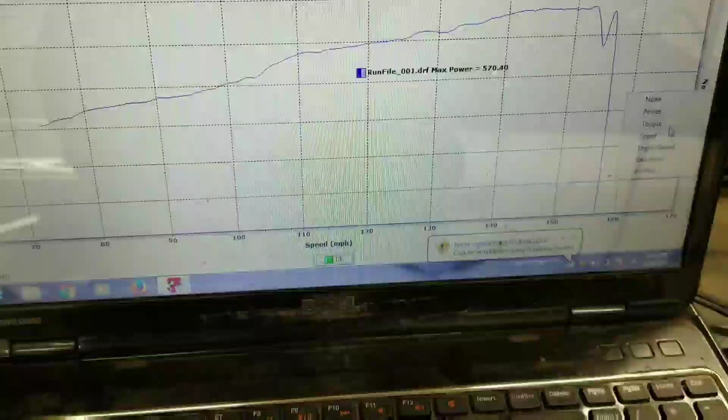Alright, so 2017 GTR. I just did a pull, and these are the results. 570 wheel horsepower, that's not bad at all. Let's see the torque. Torque is 489.99. Wow, that's not bad at all, right?

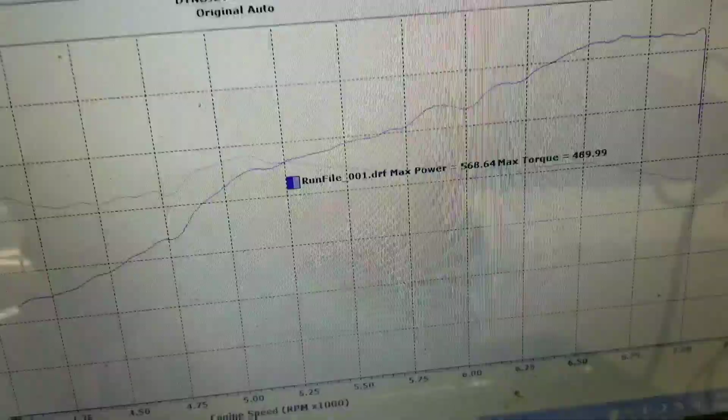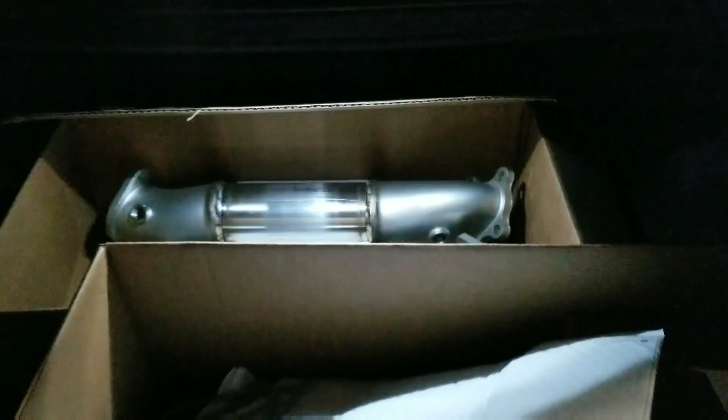Now we're gonna do everything as far as bolt-ons. We're gonna do intakes, they're actually in the trunk, let me pop the trunk. We're going to do all Catless AMS downpipes, the carbon intakes from AMS as well, a flex fuel kit, larger injectors, full exhaust, Catless exhaust, an ECUTEK tune, and then we're going to see what it pumps.

Alright, interesting. We started really high, so let's see how high we can go.

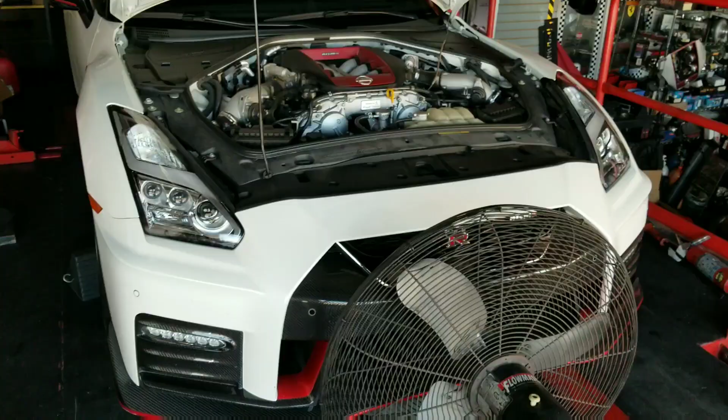Alright, good morning, so this is day 2. We're gonna start installing the intakes, downpipes, fuel system injectors, flex fuel kit, fuel pumps, all the good stuff. Then we're gonna move on to the rest of the exhaust. So it's gonna take a few days, but let's see how high it can go. Hopefully it can hit 700 or so.

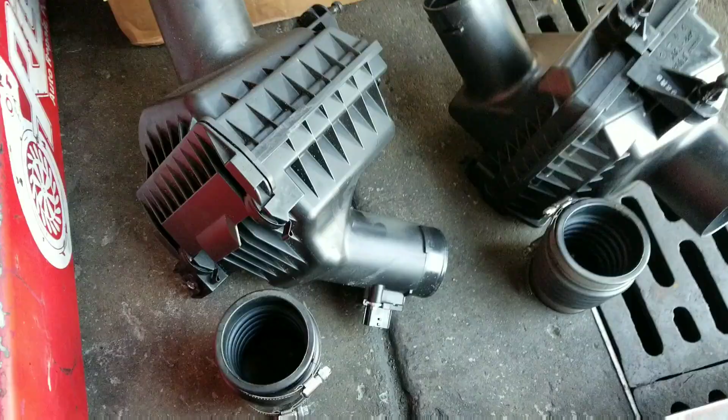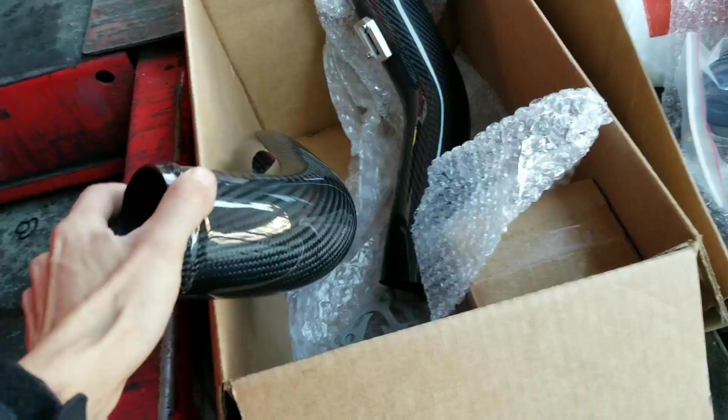Alright, so I just finished taking out the stock intake boxes. Nothing crazy, the same stuff you would find on a normal GTR. So now we're gonna throw in the carbon intakes from AMS, very light and really cool too. So this is the air filter. Let's see how it goes.

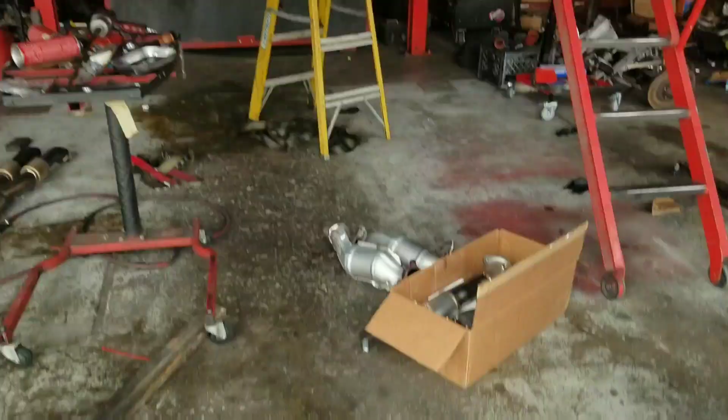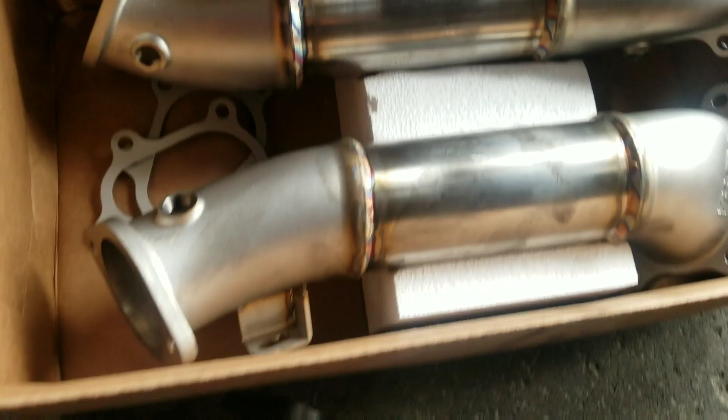Okay, so we have the car on the lift, and the reason why is because we wanted to do the exhaust now. We took out the stock downpipes, which have a huge restricted filter in them for pollution and all of that stuff. So we're throwing in the stainless AMS alpha downpipes, which have zero restriction, free flowing. That's the key for power, obviously less weight, and to unlock the flames that everybody loves.

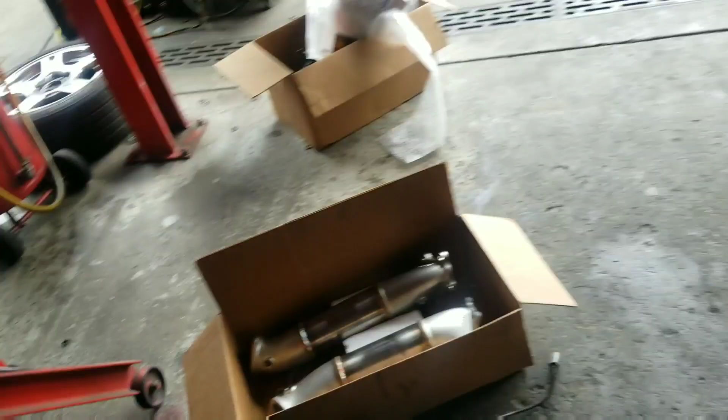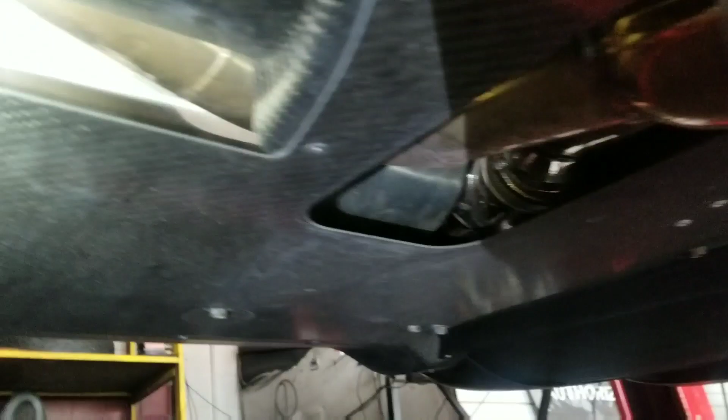What else? Oh, we're gonna do the Armytrix exhaust, so that's the Y pipe. Here's the rest of the exhaust. Can't really see it with the cover on, but this is upgraded too. And if you were wondering how the turbos look on a NISMO GTR, there they are, a lot bigger than the regular GTRs. So yeah, let's see how the rest of the build goes.

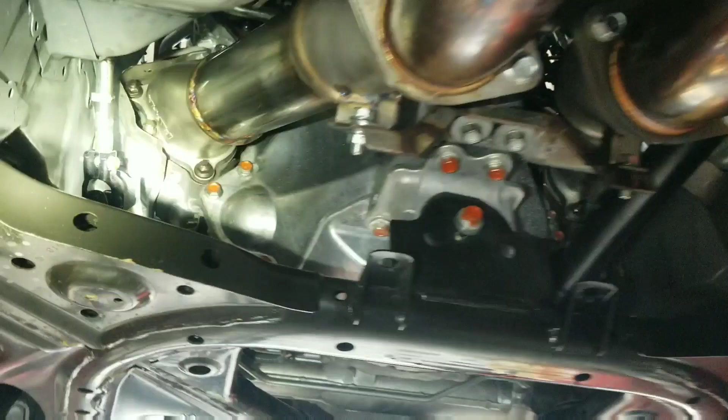Alright, so here's the entire exhaust all put together. So that's the downpipes, second one the Y pipe, and the rest of the exhaust. So now we have a nice free-flowing exhaust, so it'll sound really amazing. Can't wait to hear it.

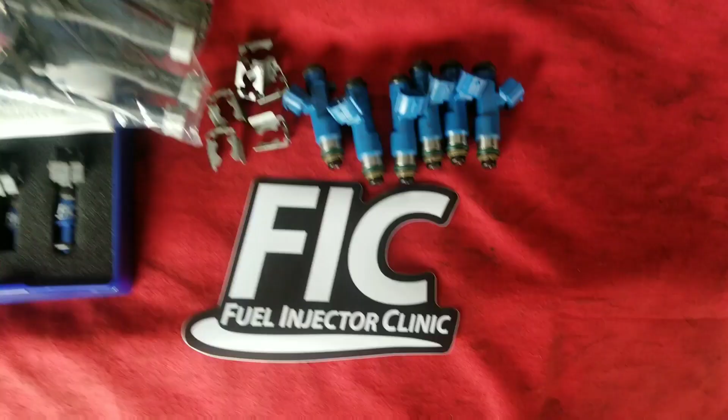Alright, moving on to the fuel system. We just took out the stock injectors, which look exactly the same as the injectors on a normal 35. So yeah, we pulled it apart and took all of that out, so we can go with 1200cc injectors from Fuel Injector Clinic.

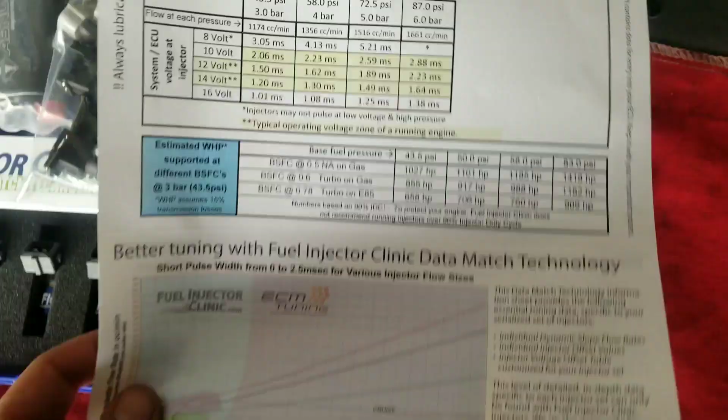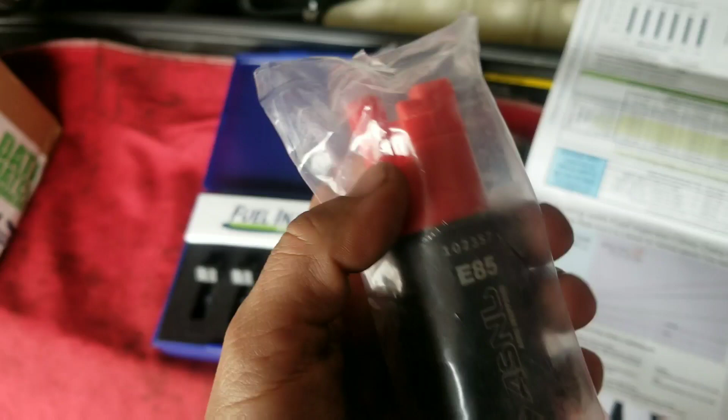This should flow to about 700 horsepower. Here you can see on the sheet these are 1200s, and the flow rate should be about 700 horsepower, so we should have plenty of fuel when we go E85 on this thing. The fuel pumps are also E85 compatible, so we don't have issues with the stock pumps rusting, and we have enough fuel flow. E85 needs a lot of fuel volume, so we have to do this anyways.

Alright, so almost there. One last step will be the flex fuel kit and some dyno tuning, and let's see what this thing puts down.

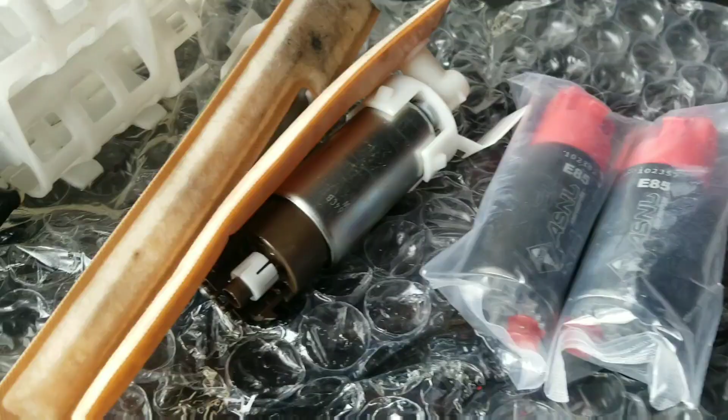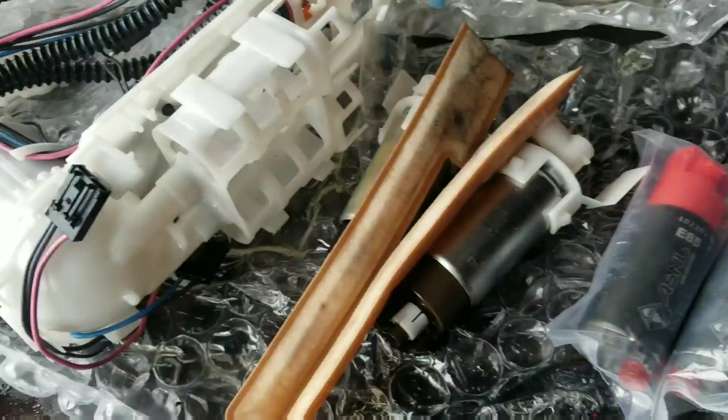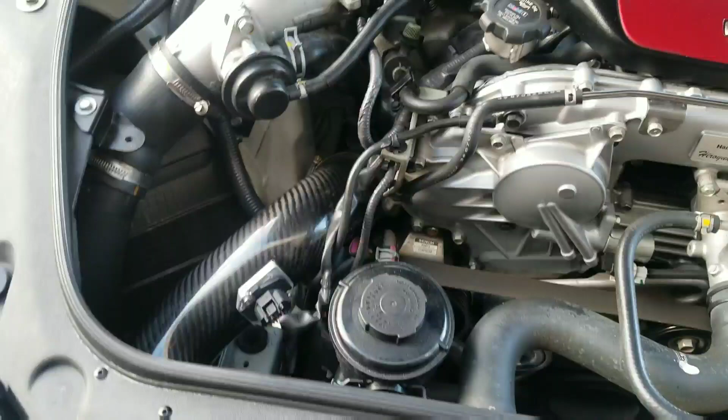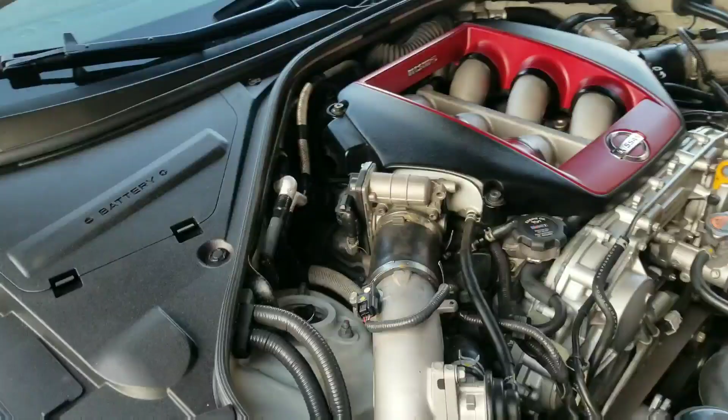Last step on the fuel system upgrade is replacing the stock NISMO fuel pumps with the E85 fuel pumps, and then it's all dyno tuning. Almost there. Okay, so the final piece of the puzzle, it's the flex fuel kit. The intakes are in, injectors are in, full exhaust is in. We are in Los Angeles, California, so this car will run 91 California gas and pump E85.

Alright, so I have just finished uploading the map via ECUTEK, so this is the time to hear it.

Wow. So that's with everything we've done in the past few days. So let's check it out from the outside.

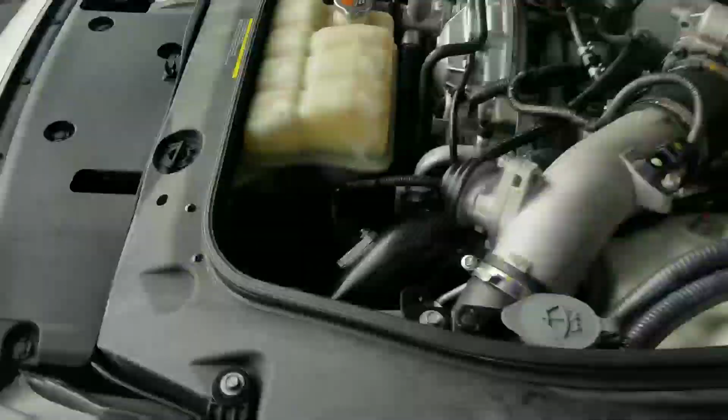Definitely louder than before. I'm gonna let it warm up and then I'll come back with you guys.

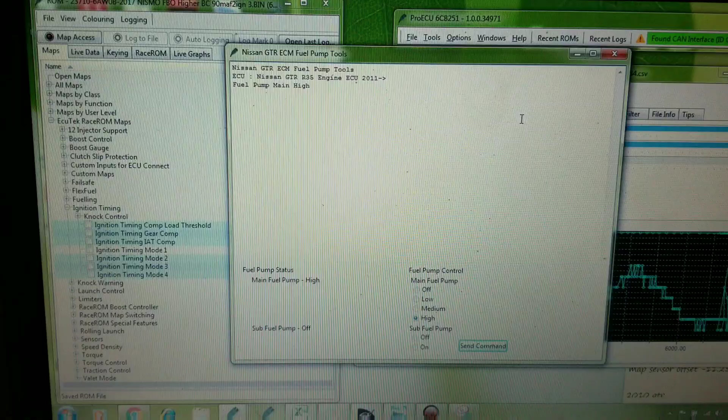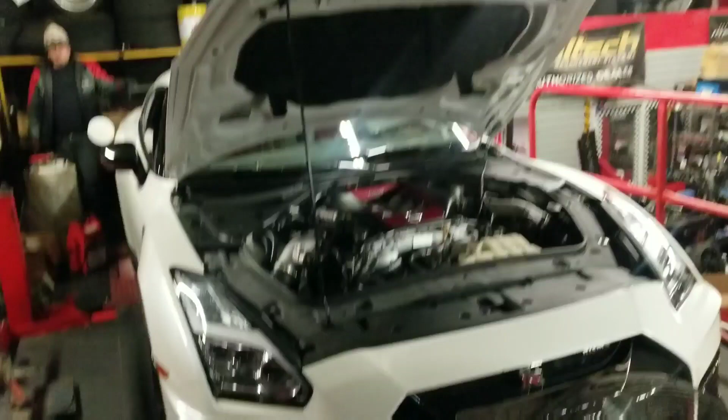Okay, so now we are draining the 91 octane fuel after all the pulls we did, so we can fine tune this car with 91. So we have my guy taking the fuel out, and time to switch to E85. Alright, so we took all the 91 out, and now we are pumping the E85. We're going to do about 10 gallons, so we can do it as pure as possible.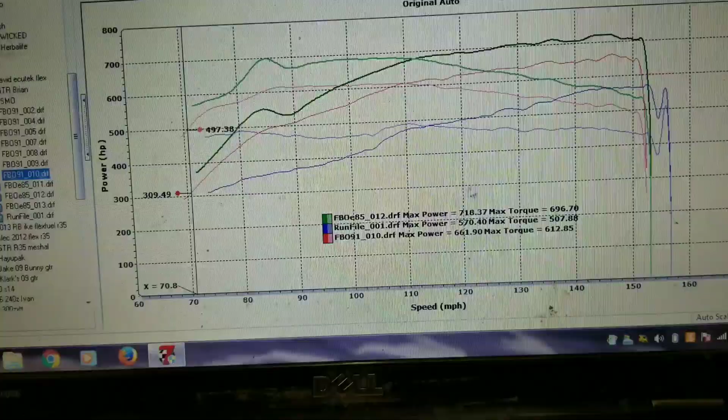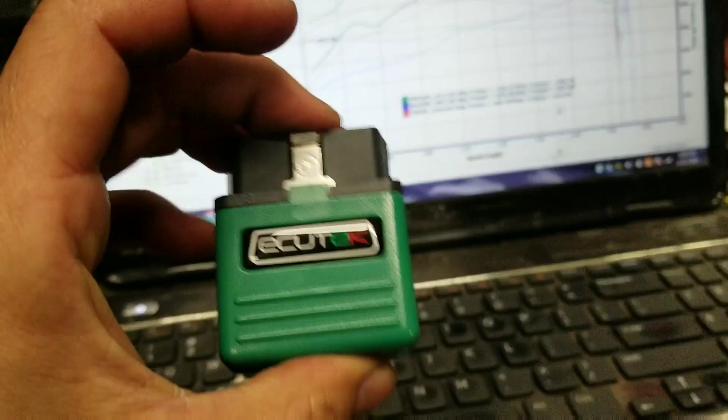Now the last thing to do is to set up the EcuTek Bluetooth, so he has fun with the flames, and you can check with your phone if you have any codes, data log, even change your boost level, a lot of little cool things.

Finally done. Well, actually now we have to take it for a spin, right? Let's go. Alright, we gotta do that again. Damn. Yeah? One more.